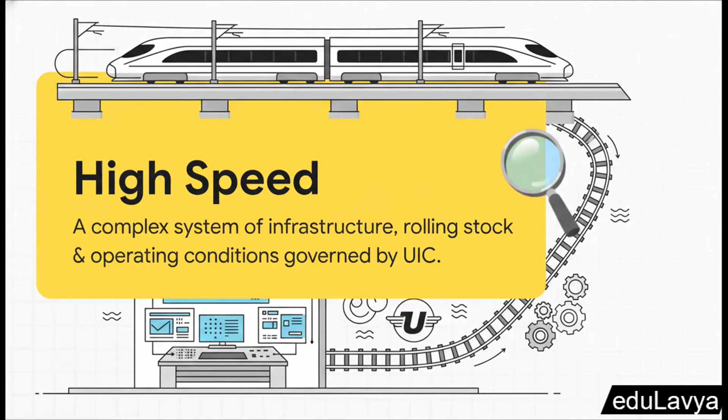Now, the UIC actually splits this definition into two main pillars: entirely new infrastructure, and upgraded classical lines. If you're building completely from scratch, your tracks need to be equipped for at least 250 kilometers per hour, which paves the way to eventually push past 300. But say you're navigating tough topography or cutting through a dense city - in that case, you can simply upgrade existing lines to hit speeds around 200 kilometers per hour.

And that brings us to a very important number, 250 kilometers per hour. That is the absolute minimum speed threshold you have to hit on a newly built line to officially join the high-speed club. It's basically the magic number. It dictates literally everything from your curve radii all the way down to your power supply.

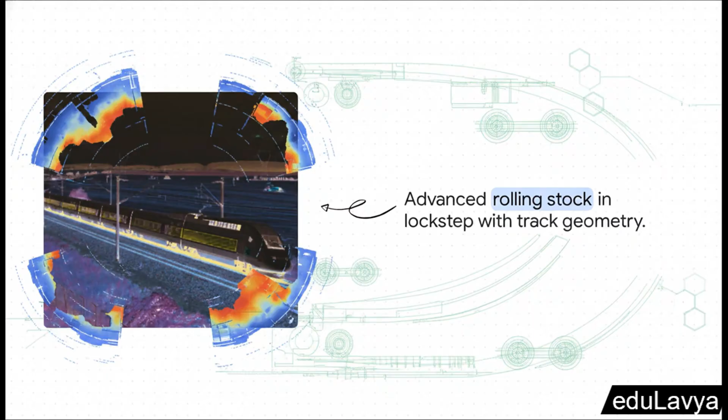Of course, reaching those blistering velocities safely requires truly state-of-the-art rolling stock that operates in total lockstep with the track geometry. At these speeds, you're trying to minimize aerodynamic drag, manage heavy axle loads, and maintain this perfectly precise fit between an angled steel wheel and a steel rail. Engineers call this balancing act equivalent conicity, and it is honestly a spectacular engineering ballet.

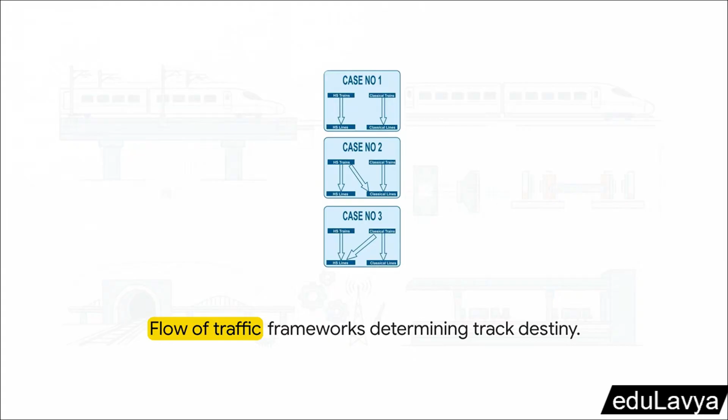Moving right along, let's hit Section 2, the four system types and track compatibility. The ultimate operational destiny of any railway really comes down to how the traffic flows. Basically, high-speed trains can either stay entirely exclusive on their own isolated tracks, or they can heavily mix with your standard classical trains. And the choice an engineer makes right here fundamentally changes the capability of the entire network.

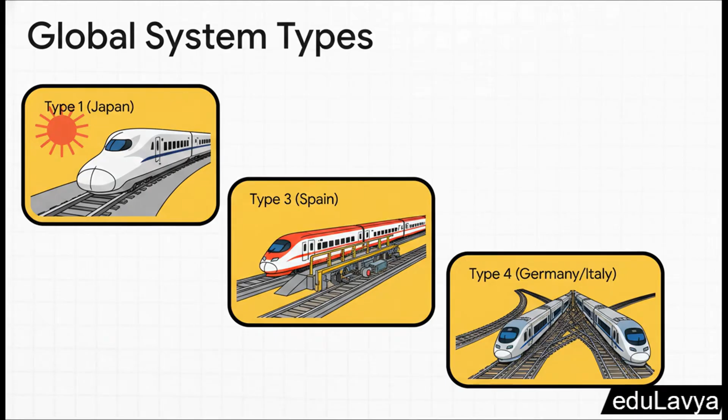Let's break these down a bit. Japan operates what we'd call the purest Type 1 exclusive system - a totally closed network just for bullet trains. Now, skipping past some of the hybrid models, we see a Type 3 system in Spain, where high-speed lines are shared with gauge-changing conventional trains. And then finally, you have countries like Germany and Italy using a Type 4 system where high-speed and conventional trains just freely mix across the board.

The specific decision a country makes between these four types dictates its track geometry, the maximum axle loads allowed, and ultimately its overall maintenance costs. Basically, the purer your system is, the easier it becomes to maintain those microscopic track tolerances. And that's absolutely crucial, because keeping heavy, unpredictable loads off those rails is exactly what guarantees you that incredibly smooth, glass-like ride when you're hurtling along at 300 kilometers per hour.

Which brings us to a major headache for engineers: Section 3, the speed conflict between passenger and freight trains.

Look, if you try to mix a 300 kilometer per hour bullet train with a heavy, lumbering freight train, you immediately trigger a cascading nightmare of delays, track damage, and safety hazards. First off, the fast trains completely eat up the operational paths of the slower ones. Second, those incredibly heavy freight axles practically destroy the delicate geometry of the track. And third, you create some severe aerodynamic dangers inside tunnels.

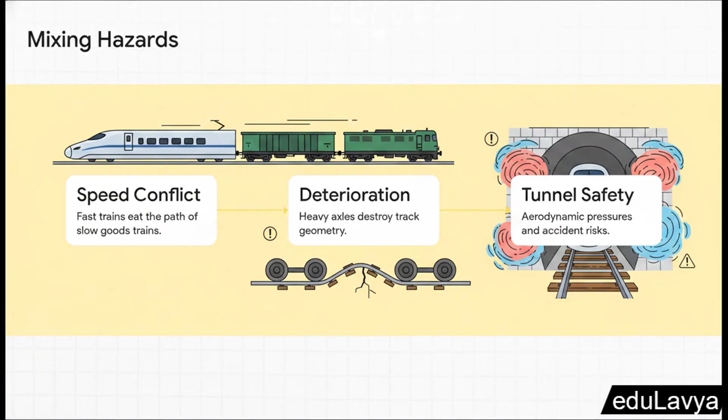Let's zoom in on that scheduling conflict first. Because a bullet train closes distances so incredibly fast, it needs a massive empty safety buffer ahead of it. To put that into perspective, because of this huge speed differential, just one single high-speed train will actually consume the operational path of 3 or more slow-moving goods trains on that exact same track. So by mixing speeds, you are literally deleting capacity and creating an enormous bottleneck.

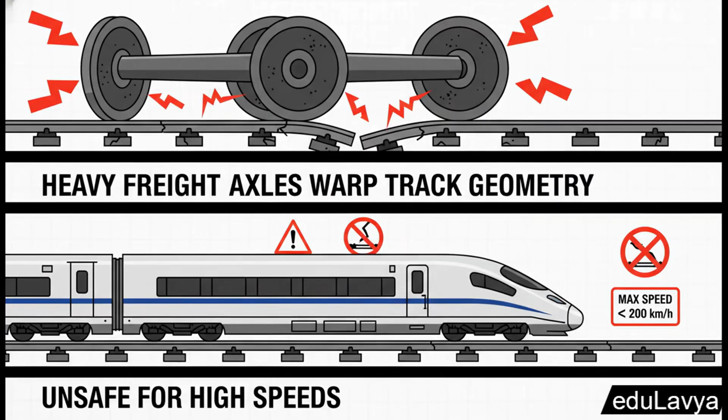On top of that, the sheer physics of those heavy freight axles grinding down on the rails makes it basically impossible to maintain the delicate track geometry you need for safe high-speed running. The studies are super clear on this. Heavy freight trains permanently warp the horizontal alignments and vertical curves, and those are the exact features a passenger train relies on to stay safely on the tracks at 250 kilometers per hour.

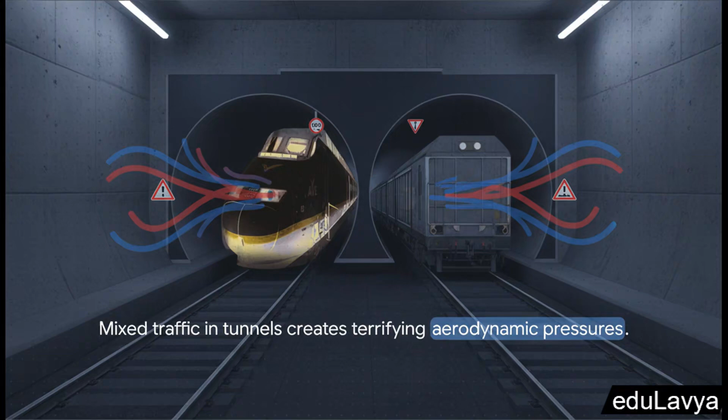And it gets scarier in two-track tunnels, where mixed traffic creates terrifying aerodynamic pressures and severe safety risks. Imagine a high-speed train passing a slow freight train in an enclosed space. It acts like a giant piston, creating these incredibly dangerous pressure waves. To prevent a catastrophic accident, high-speed trains are often forced to heavily reduce their speed inside tunnels, which, let's be honest, kind of defeats the whole purpose of building a high-speed line in the first place, right?

So how do we fix this? That leads us to Section 4, segregation and maximum capacity. The most effective answer, as study after study has proven, is total segregation. You simply have to pull the freight off the high-speed line to maximize both safety and capacity. I know it sounds incredibly simple, but isolating your high-speed passenger traffic from your heavy goods traffic is truly the golden key to unlocking the full potential of your railway network.

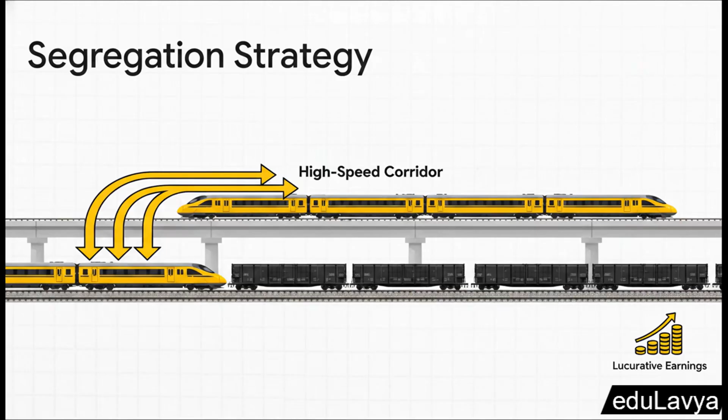For example, Indian Railways looked at this exact strategy for their future lines. Their solution: construct a brand new, exclusive high-speed corridor. Then, by shifting standard passenger trains onto that new corridor, they magically free up massive amounts of space on their old tracks for those lucrative freight trains. It's really a brilliant two-for-one solution. It drastically increases the overall network earnings while simultaneously modernizing passenger travel.

But okay, there is a catch here. You can't always fill bullet trains to the brim all day long from day one. So to avoid leaving a brand new expensive line underutilized, operators can intermix 350 km/h trains with conventional passenger trains. But critically, and this is key, those conventional trains must run at a minimum of 140 km/h. Doing this narrows the speed gap just enough to prevent those severe traffic bottlenecks we were talking about earlier.

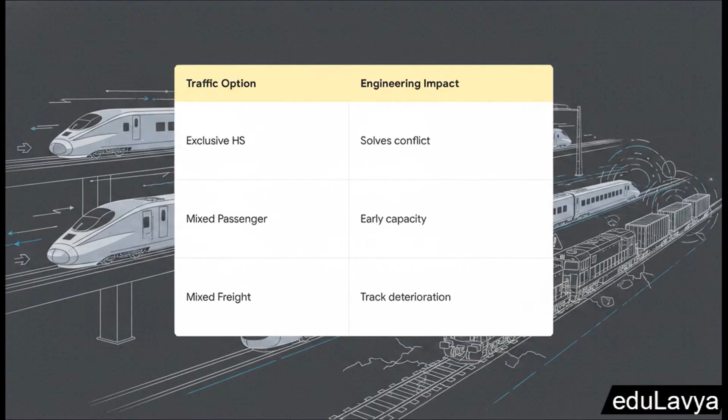So, to quickly summarize the taxonomy we've explored today, mixing passenger speeds is an acceptable compromise if you need to build early capacity. But mixing high-speed passenger trains with heavy freight, that's an engineering nightmare that destroys tracks and creates huge aerodynamic dangers. When it comes down to it, the exclusive high-speed corridor remains the absolute pinnacle of rail engineering.

Which leaves us with a really critical engineering question for the future of global travel. As our populations grow and our cities become more connected, what kind of system will your region choose to build? Will it rely on a compromised mixed railway, or will it push for a perfectly segregated high-speed ecosystem? Think about that next time you take a train.